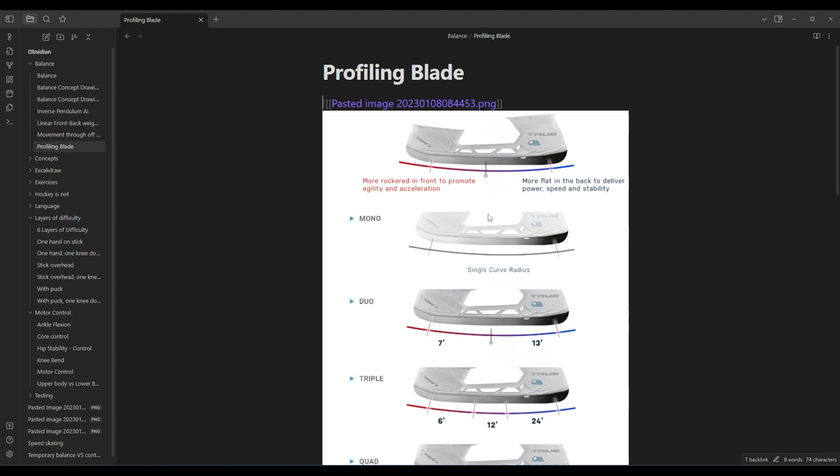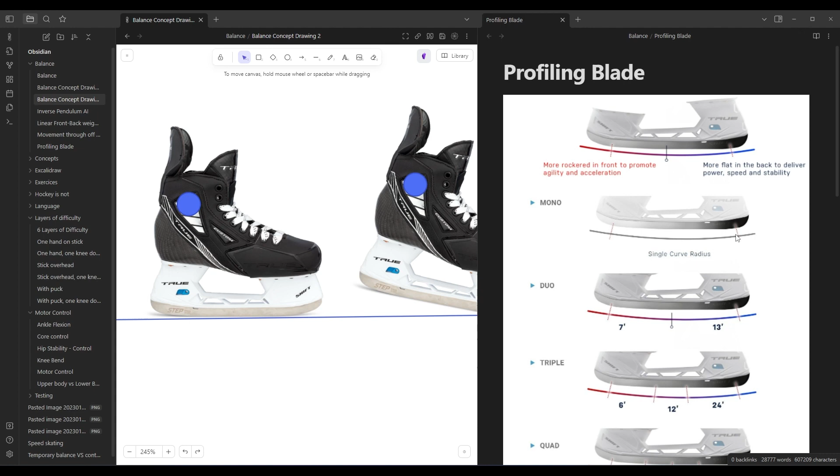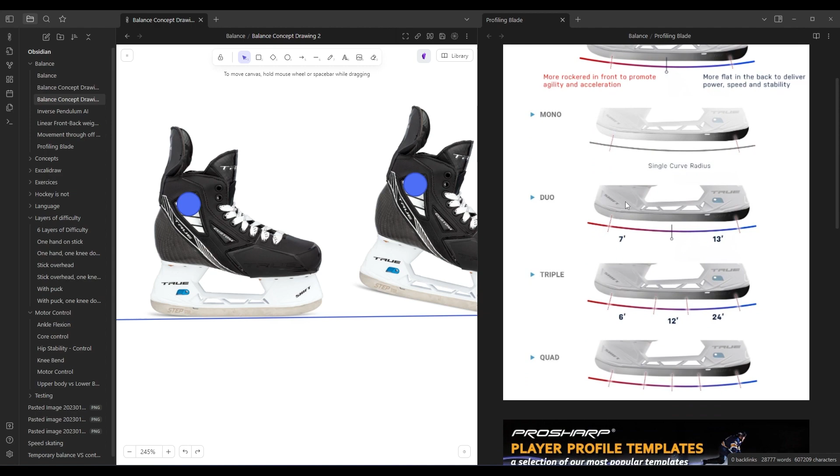Here's my thought. I'm gonna bring this in also, side by side. So here's a picture of the rocker on the ice. You have a flat part in the middle, and this is a profile part. On a single curve radius, this full area is in fact the profile that the profiling system is going to tell you about. So here, single radius would be 17 feet. That's what we're going to use, to make my life easier, and then I'll see if I go further down. Those are, by the way, Blade Tech - I think this one is Blade Tech and this one is ProSharp, you can correct me if I'm wrong.

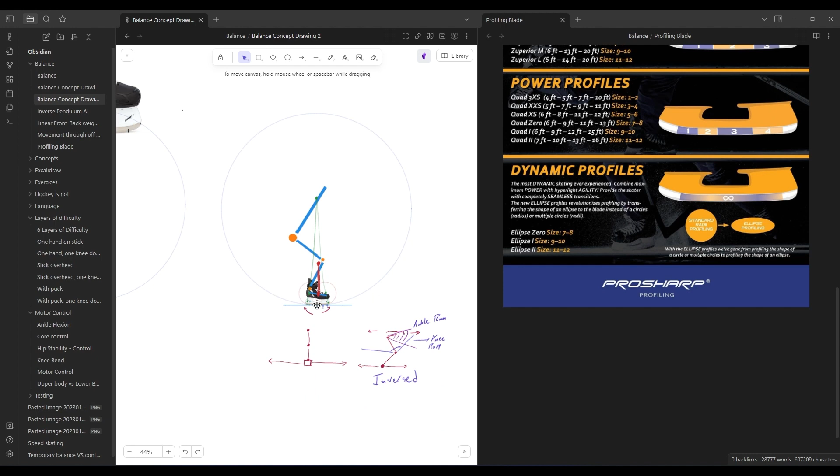These are different circles joined together, with different radiuses. So the flat part is one radius, and for me anyway, I want to go there - the profiling doesn't go there, because it's not the purpose of profiling. But the blade doesn't stop with the profiling, so the profile is that middle section. This is exaggerated, but the profile is here. It really doesn't matter if you divide it into 3 or 4 or 1 - the flat part or flatter part is going to be different, but it's still the flatter part.

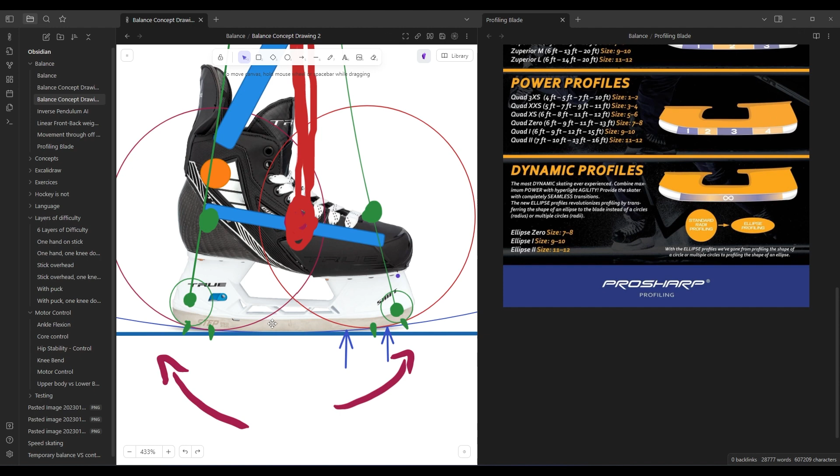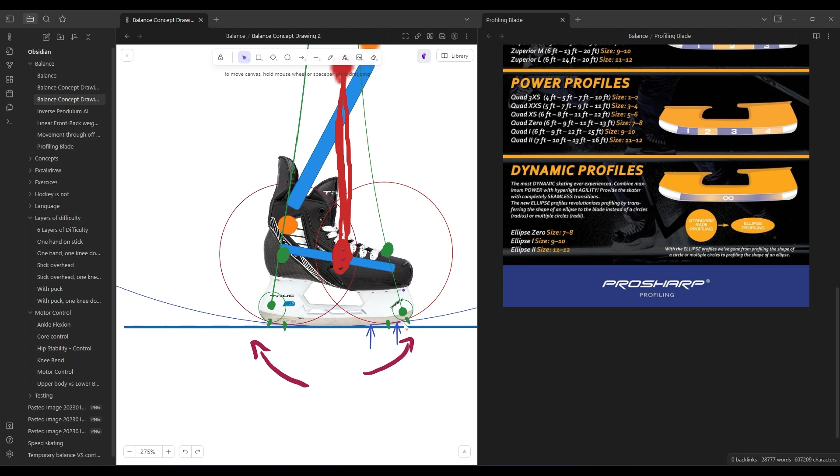But then towards the end of the blade, you also have this radius here and the end radius where the end of your blade is. We don't take much care about this, and that's fine, but I'm going to model it anyway. I like to understand different concepts, and I like sometimes to go to the extreme. This isn't going to happen on the ice, but to understand how this would affect the weight - and you can understand that the leg doesn't have free movement like the triple pendulum thing we saw, so some movements are going to be limited. By going to the extreme, I can see where some of the limits are, and the effect of one concept over the other.

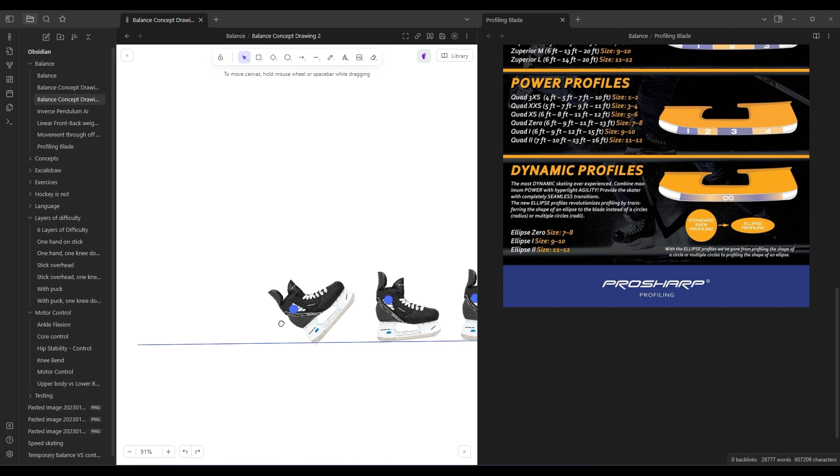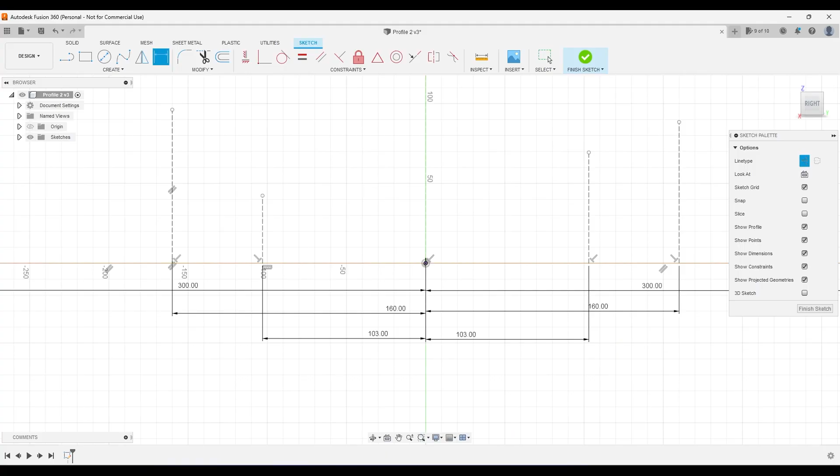So basically I'm going to model 5 circles or 5 arcs. The first one's going to be 17 feet. These two here, I've tried before and I kind of have to go by ear, because I don't know how it's done in the profiling systems or manufacturing systems - profiling is only taken care of up to a certain point. Then the ends I'm going to make constant, because I think they would be constant - I'm not sure.

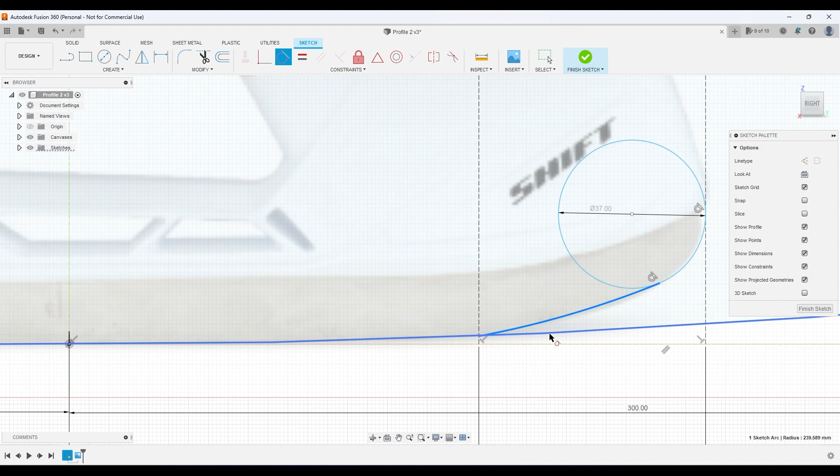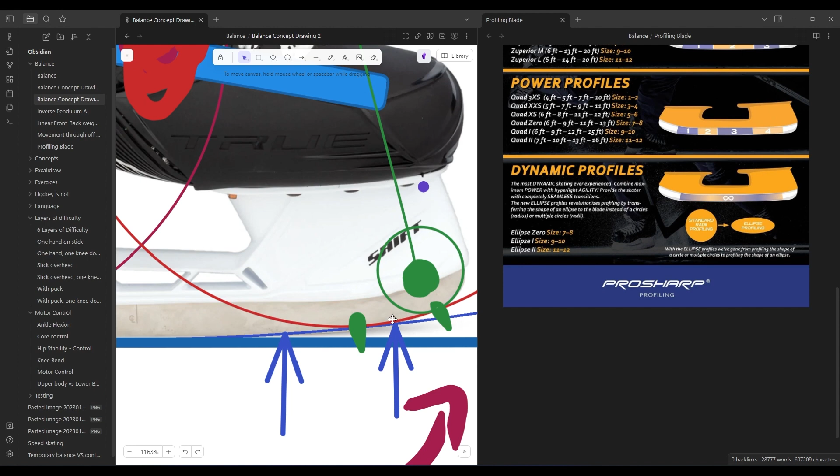The circle of the arc - the center point of the arc - matters when it's going to be time to roll on the different size wheel. If I lift the skate, then I'm going to be using this part here. If the skate is rotated forward because I'm on my toes, then the pressure is going to be on this part, which is not the same radius as that blue line. It's important for me to know where that center point is, because it's going to be my pivot point for when the weight is on that part of the blade. So when we get to this position, that's the second radius we're using. This is the flat part, which is the profiling, and then there's the green circle, which is the smallest radius.

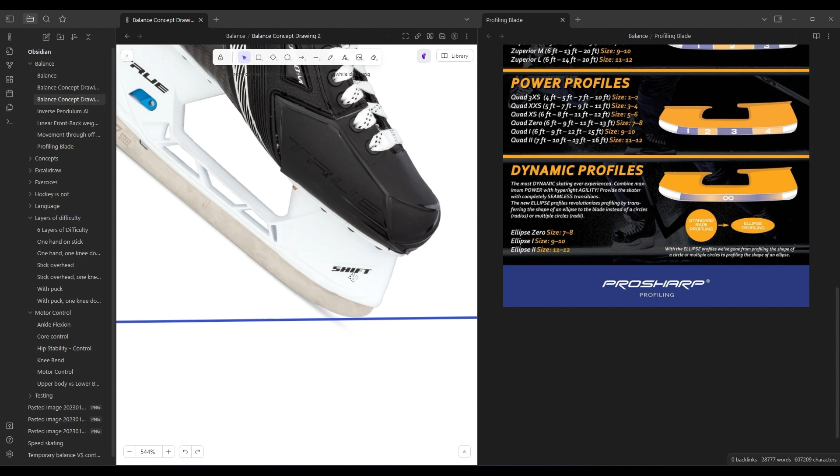But the positions of the pivots are going to be important.